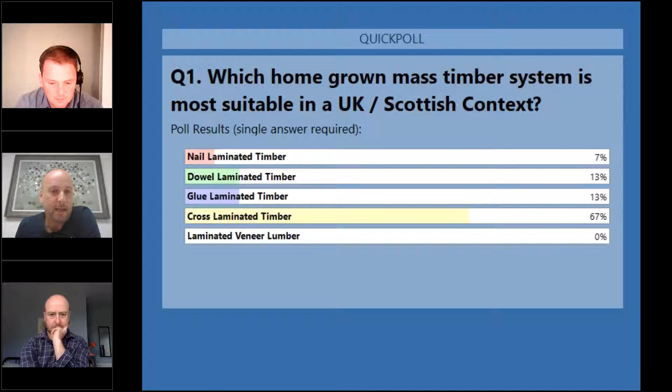So there's the results, and no huge surprises. Cross-laminated timber leading the way there, followed by glulam and dowlam jointly, and then finally nail lam, with no votes for laminated veneer lumber. Okay, thank you very much.

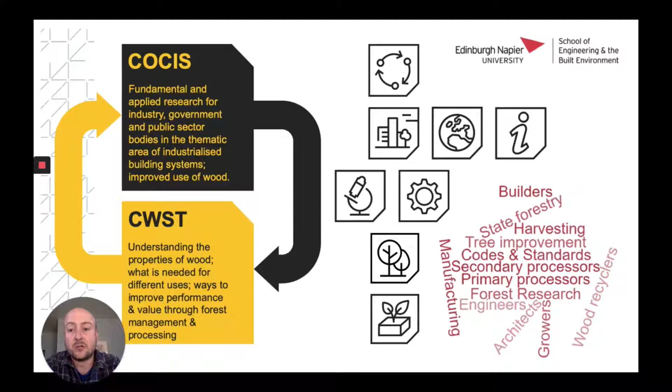We do this through undertaking core and basic research, applying that into the sector in order to create impact, and we engage externally with both industry and stakeholders in that regard. Importantly, we map student talent onto this through the Built Environment Exchange Programme to accelerate their careers, but fundamentally to accelerate cultural change within the sector. We don't do our work in isolation, indeed we do it in collaboration, both externally and internally. With respect to this project, the Mass Timber project, we work closely with the likes of the Centre for Wood Science and Technology, given that they undertake the research work to understand the properties of wood, the influence of silvicultural practices, and what this means in terms of grading rules, etc. By us interfacing with that work, we can look to add further value to the resource through such things as engineered timber products and indeed mass timber systems.

We have a back catalogue of work in this regard, and indeed we work across the varying systems in terms of panelised, volumetric, hybrid and sub-assemblies, and we've worked a great deal with mass timber systems, both in terms of

homegrown mass timber products, where we've even pilot manufactured and tested these products and indeed utilised them within showcase examples such as the Commonwealth Games Athletes Village.

We've worked also with imported resources such as tulip wood and the American Hardwood Export Council on the Multiply project, which was exhibited at the V&A in London, where we undertook the quality assurance test work.

And we've also worked with the likes of Carbon Dynamic on the Dyson Institute for Engineering and Technology, which used, of course, imported resource, but we provided a degree of engineering intervention with respect to the volumetric CLT units that were to be used for that project.

Importantly, we digitise a lot of this work. We harness our research in the digital environment, and indeed we have a strategic agreement with Trimble, and we have established a Trimble Technology Lab at Edinburgh Napier.

And of course we exhibit this work publicly as well, working with the likes of Architecture and Design Scotland, and of course we also publish this work through such publications as Mass Timber, an Introduction to Solid Laminate Timber Systems, and most recently Off-Site Industrialised Timber Construction, published by TRADA.

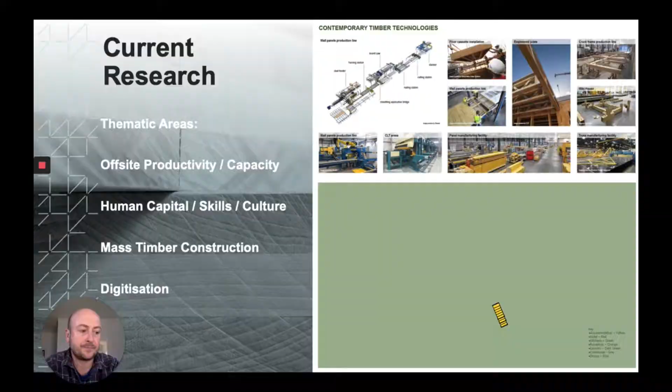So we work across a range of thematic areas: off-site productivity and capacity, human capital, skills and culture, mass timber construction, and indeed digitisation. And we do all this work with a large influence and to create impact into the

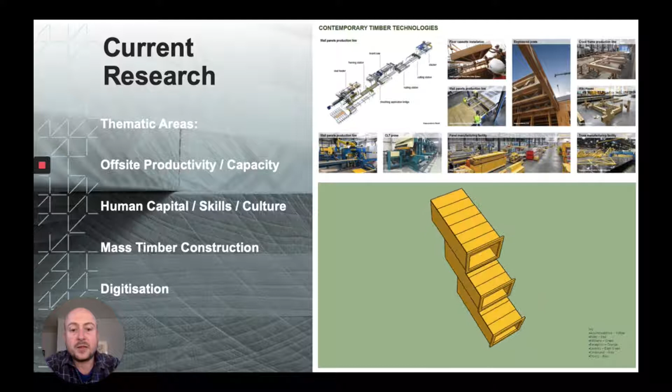sector with respect to the specification of contemporary timber technologies. Importantly, these thematic areas, of course, cross over each other, and if we take productivity and construction productivity and why

it's stagnated, and of course we want to improve upon that through off-site and manufacturing approaches, but equally taking cognizance of the necessity of delivering this new built environment for such things as the growing urban population without impinging upon

the environment itself through the utilisation of non-renewable resources. So of course using timber in this respect is beneficial as a result of it sequestrating carbon, whereby if we

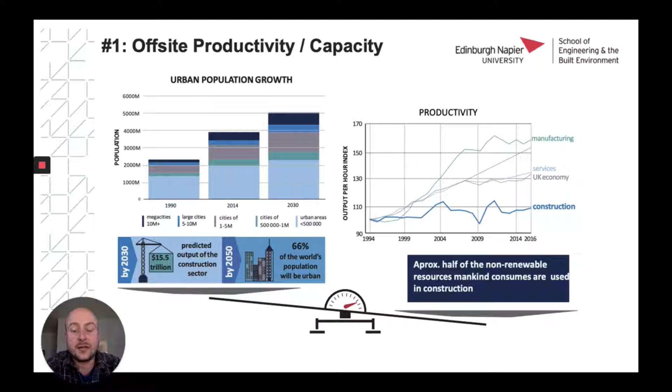utilise mass timber products and systems, then we can lock more carbon into the environment and actually start to reverse the climate crisis. So we've worked across the varying mass timber systems in terms of both the glued and non-glued

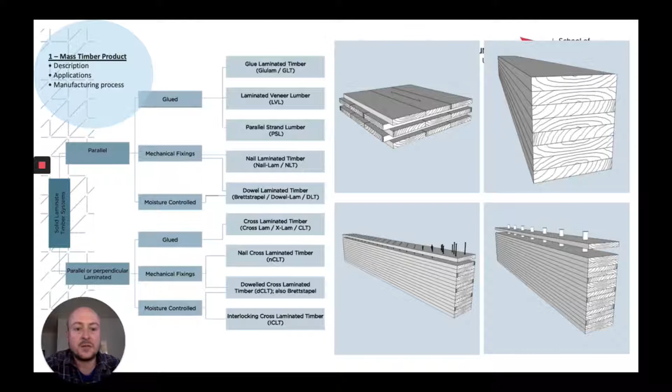products, in terms of CLT, glulam, nail-lam and dowlam. And we have an awareness of this wider global market and the upward trajectory which has taken place in terms

of European production output, and indeed the boundary conditions which are being pushed through the delivery of such projects as Mjøstårnet, which is an 18-storey building in Norway which uses engineered and mass timber products for its delivery.

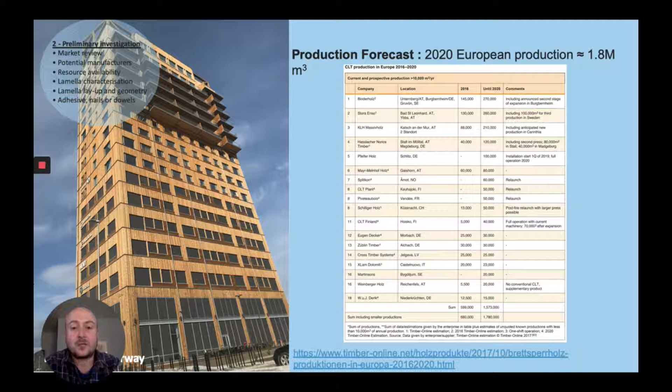So there's a huge opportunity which resides globally, and we'd like to see that take place in UK and ideally in Scotland. And of course, to mobilise this, we have to understand the investment model.

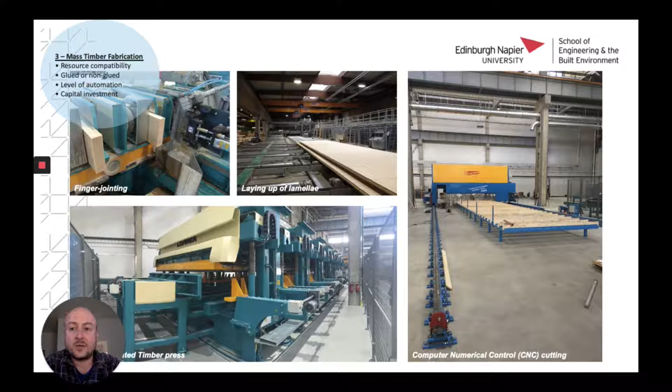We have to understand what's necessary to unlock that capital investment for manufacturing to take place, and of course integrate that with our available resource and select the right mass timber product to be utilised.

course ourselves as the academic delivery partner, and assembled a cross-section of stakeholders from the supply chain with respect to tap into their knowledge base as well.

So in this regard, we have a series of work packages which we're working through, and today we will showcase those to you, and Wojciech will provide a wider explanation of the work that's been undertaken today. So with that, I'll hand over.

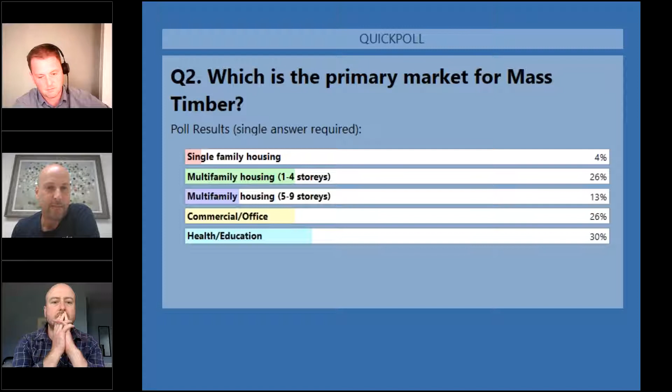And there we have some fairly close run results. Health and education coming out on top, just in front of commercial and office and multi-family, low level or low rise housing. There's some higher rise stuff there, and single family housing coming up at the end. So thanks very much for that.

Okay, our second presentation today is from Wojciech. Wojciech's been the lead academic for the commercialization of mass timber project we highlighted earlier, and I'm delighted to welcome him to give us an update on the work that's been undertaken to date. So Wojciech, over to you.

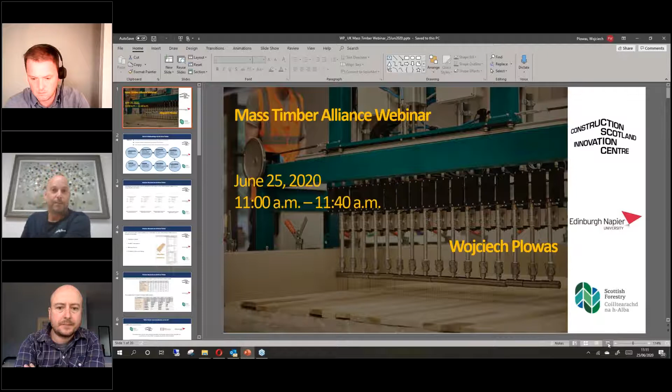My name is Wojciech Płowaś. I'm a research consultant at the Center for Offsite Construction and Innovative Structures. My background is in structural engineering. I specialize in timber engineering. And for the past few years, my research focus was on mass timber systems such as CLT, dowel laminated timber, nail, and glue laminated timber.

Well, today I will talk to you about the recent advances we've made in the last few months in the research of mass timber systems. However, before I continue with my presentation, I would like to briefly introduce the research methodology that we adopted during the research of mass timber.

So the research methodology first came into play when we were thinking about best ways of utilizing all the research information we have on file. So in a sense, it formed a platform to ensure the consistent reporting of all the available information. What it also allows us to do is to identify any gaps in the research. So just to quickly go through the steps adopted during the research.

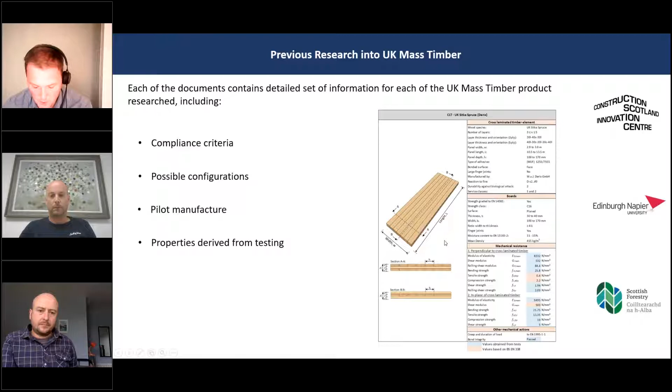Finally, you will also see mechanical properties derived from testing. So this is only one table. There's way more tables like that available within those documents.

And this is one of the reasons why, together with Construction Scotland Innovation Centre, Scottish Forestry, started this project, mass timber commercialization. So one of the reasons is also to close the gaps, but also to get full understanding of the feasibility, potential cost, benefits, constraints of mass timber manufactured in Scotland using a homegrown resource. So as Robert has mentioned, the project is split between 4 distinct work packages.

So work package 1 is to do the parametric analysis of mass timber design and analysis exercises using the research data, so applying the results, updating what we know already, and extending the information we have. And this is also to do with the development of technical details. Work package 2 is the market assessment. So this is where we look at the potential costs of different mass timber products and how do they compare with the materials and products available on the market.

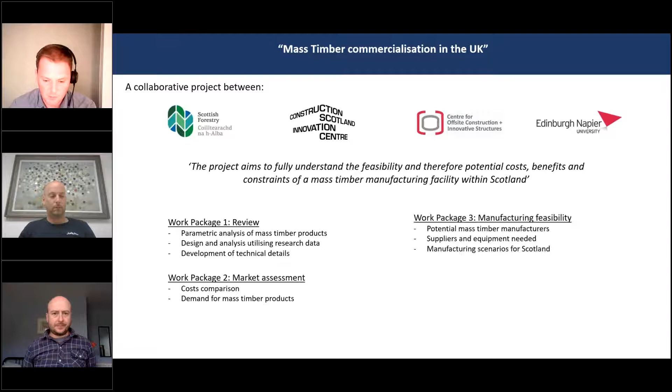What we also try to do via this project is to get an understanding of the current demand for mass timber products. Work package 3 is the manufacturing feasibility. So this is where we're going to create the case studies for manufacturing scenarios, so setting up the manufacturing facility in Scotland. We're going to review the potential suppliers of the equipment, what equipment is necessary, and so on. And finally, is the work package 4, fabrication and pilot project.

So what I'm going to talk today is the first two work packages. So we've carried out some parametric analysis, carried out some design exercises utilizing UK homegrown mass timber. I'll focus mostly on the CLT. Also, I'm going to close off my presentation with some information on market assessment.

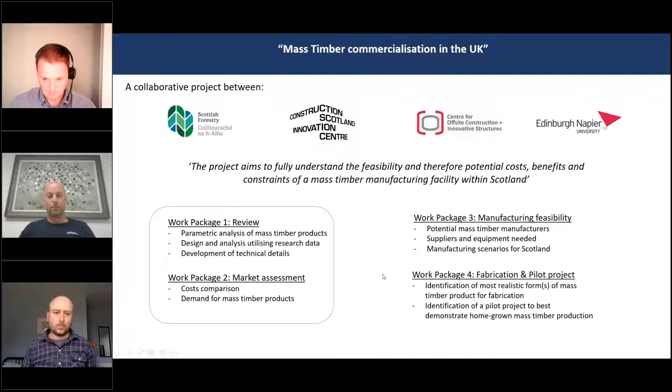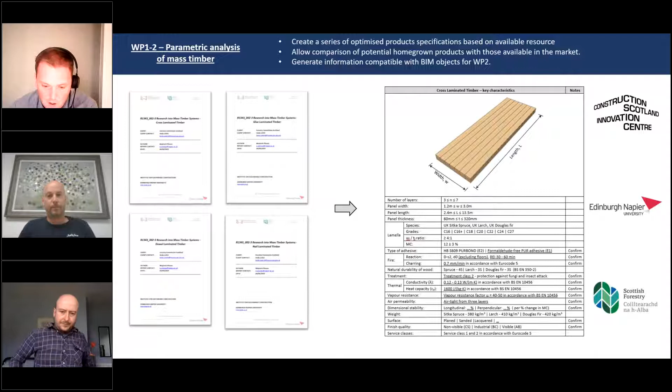Another part of the work package 1 and parametric analysis was to compare a potential CLT made out of UK homegrown resource and what's currently available on the market. So we've reviewed the literature. As a result of the research carried out by the center within our institute, we know that the UK Sitka spruce, which is the species most likely to become a commercial species, can grade 25% to C24 and the remaining 75% to C16. So this can be achieved with a minimal amount of reject.

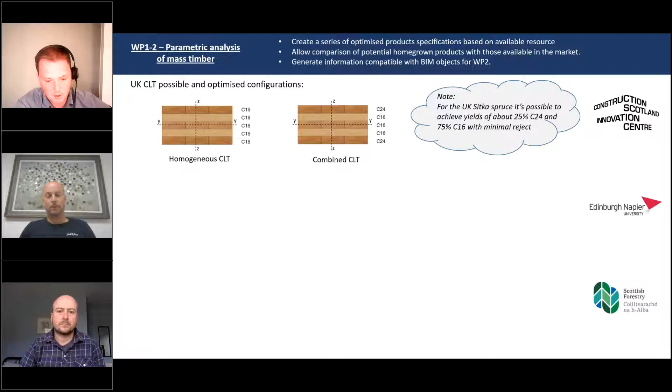So now the idea is how to best utilize this resource. So for that, we've created a series of hypothetical panels, let's say, made out of UK homegrown, that one day might become a homegrown CLT. And in order to best utilize the material, we've introduced 2 types of the material. One being the homogeneous, denoted by the letter H, which contains only one grade, which is in this case C16, and what we call combined, which is consisting of C24 and C16.

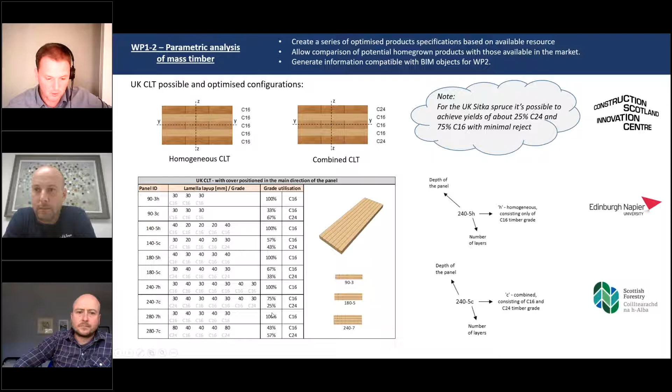If you notice in this table, you can see that the C24, the higher grade timber, which is stronger and stiffer, is located at the top and the bottom of the panel, and there is a reason for that. It's to do with the stress distribution when the beam is subjected to loading. So the highest stress concentration is always at the top and the bottom of the beam or panel. Okay. Also included here is the percentage of how much grade is being utilized. I'm gonna carry on. I'll tell a little more about this in a few more slides.

Okay. So after creating a list of hypothetical UK CLT panels for comparison purposes, we had to develop a design spreadsheet to allow us to create almost indefinite types of panels with as many possible layups as possible. So we've done that. We are now in position of changing the layout the way we want, the way the market needs, and check in this case just structural performance.

So in first instance, just to check what we're dealing with, we've compared those three panels. First panel being a standard CLT, which usually consists of C24 high-grade material. We then compared it to C16 homogeneous CLT and a combined version of it.

Throughout the research, it might not come as a surprise to anyone here that the most critical factors determining the design with the CLT, design of the floors, is either deflection or vibration of the panels. So these are the 2 properties I focused on because those 2 are the most often critical.

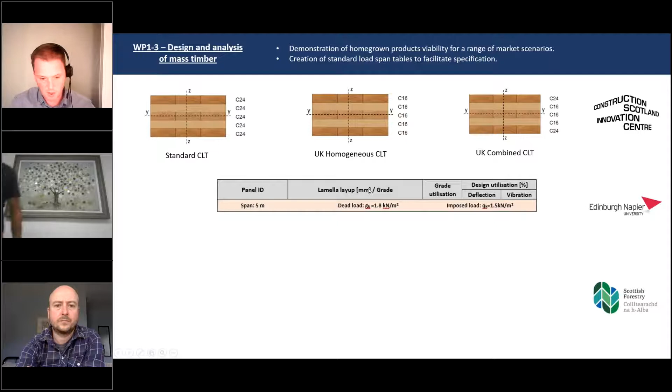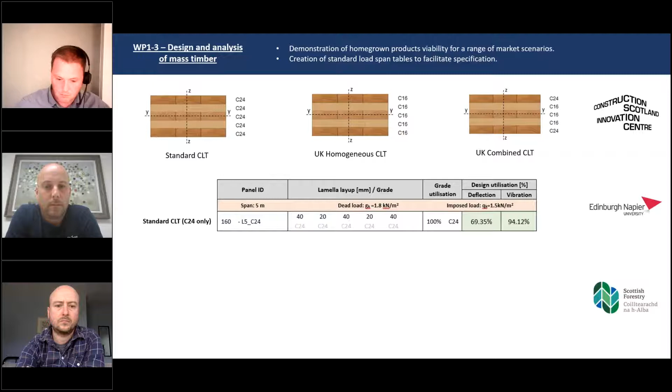So just to carry out the simple comparison, I created this span. So all those 3 panels were subjected to the same span and loading conditions, designed in the same manner. So if you look at the design output for CLT made of C24 only, it passes the design, it's good to go. Using the same method for design of the CLT panel of the same depth and the same lamellas and the same configurations, we see that this panel would fail in vibration.

However, if we change the top and bottom lamellas to the stronger material C24, which will result in a 50-50 split between two timber strength grades, we will almost pass the design. And the percentage you see here, maybe I should have told that earlier, is the utilization. So in this case, 94% of the strength is used to resist the vibration. It's almost as good as the C24 only panel.

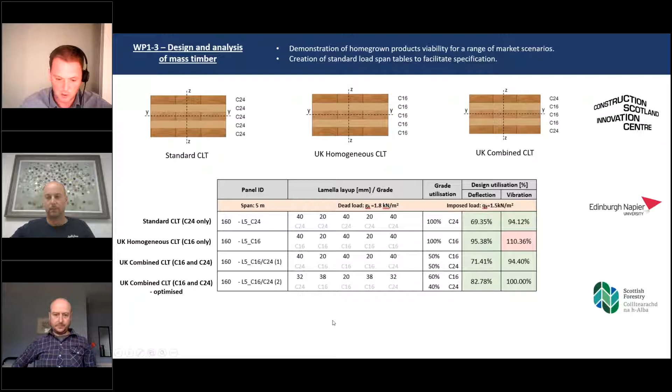Just for fun, or just to prove the point and check how spreadsheets can be used, we created an optimized version. So the panel depth is still the same, but what we've done here, we optimized the ratio of the different strength grades, and the result came up positive. Although, yeah, 100%, we passed the design, but this is just really for the demonstration. We probably wouldn't go with this panel. We would have to slightly increase the top and bottom. But this is just to prove that we can modify the layup the way we want.

Okay. So another way of using the design spreadsheets we've developed is to create span tables for those 5 different types of panels, which represent the UK span tables for the UK CLT. So we used 5 different loading conditions for development of the span tables, and those reflect the designation of the building: single-family dwellings, hotels, offices, classrooms, and museums. The list is longer, but this seems to be most appropriate for the context. So you will see in a few slides that we use those variable loads as case studies.

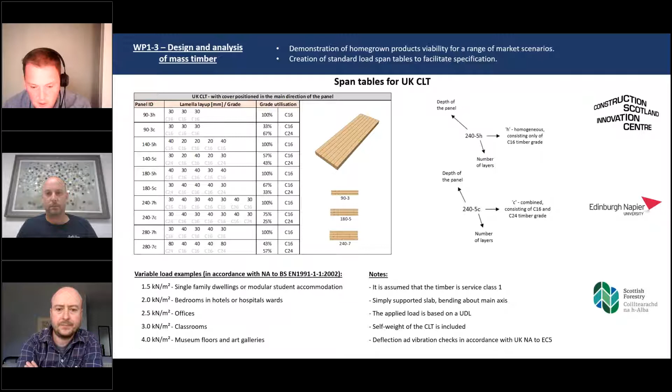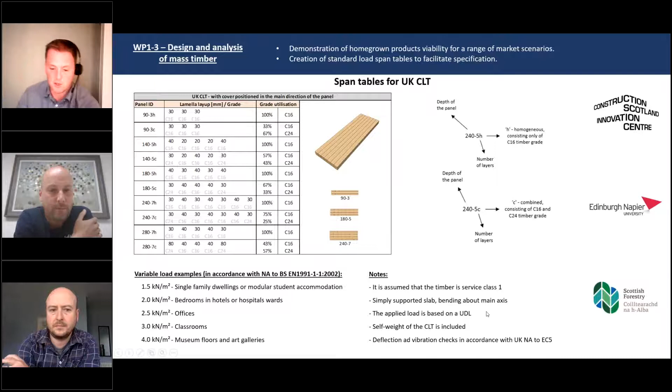A few notes regarding the design for those of you who are interested. I'm happy to answer more detailed questions after the presentation, but for the purpose of this presentation, I added those notes. So in the design, we assumed that the timber is service class 1. The slab is simply supported and bent about the main axis, and only UDL is applied. Self-weight of the CLT is included. Deflection and vibration checks are carried out to the UK National Annex to Eurocode 5.

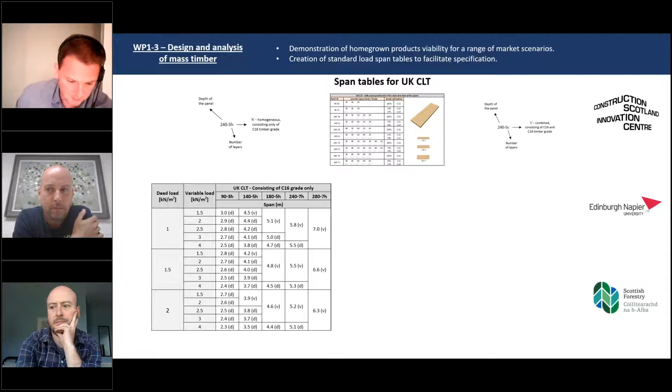Okay, so using all this information, the list of hypothetical panels, we've created a span table. So what we have here is loading. We've got the dead loads, 3 different cases for the dead loads, and 5 different variable loads. At the top of the table, there is the type of UK CLT that we're looking at. Here is the ID of the panel. The first number stands for the depth of the panel. The second number stands for the number of lamellas used, and H or C stands for either homogeneous or not homogeneous, as shown in this table.

Finally, we have a maximum span in meters. What I've also added is the letter V or D, which stands for vibration or deflection. So this is the design output, and what's the most critical for this particular panel, whether it's vibration or deflection. Okay, so we talked about UK homogeneous CLT only. Now we have a combined CLT. Again, the panels here are consistent with the list of the panels in the table. So we can see here that the span increased significantly.

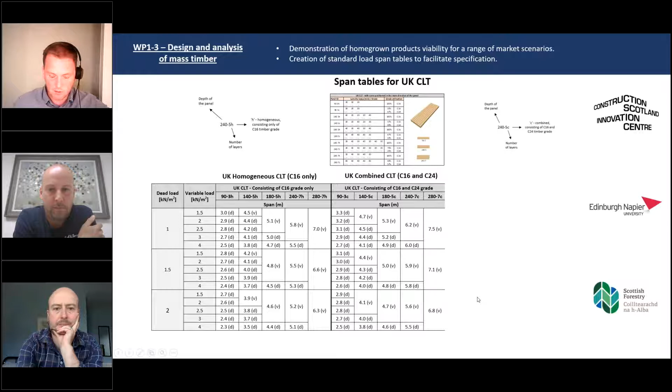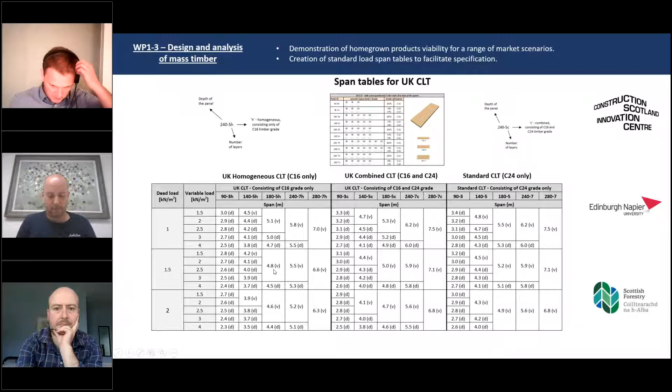Just for full context, using the same methodology, we also carried out design exercises and created the span tables for C24 CLT only. At this point, you're probably looking and trying to compare the span tables. I would go through that as well, but I would try to make it easier for everyone, because I crunched the data. So how exactly does standard CLT made entirely from C24 compare to UK homogeneous and UK combined CLT? After looking at the data, we've noticed a 9% reduction in span on average.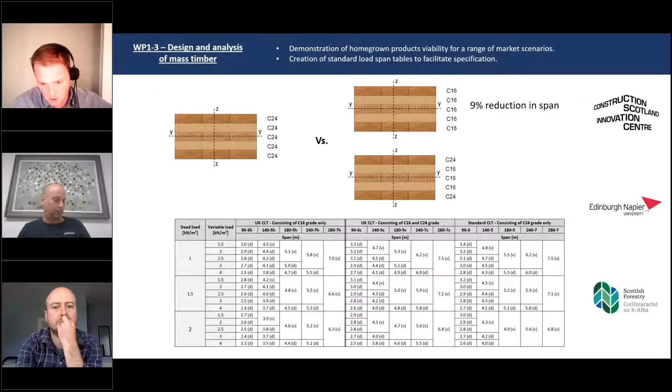The difference is 9% between C16 and C24 CLT only. In another case, the combined CLT, there's only 2% reduction.

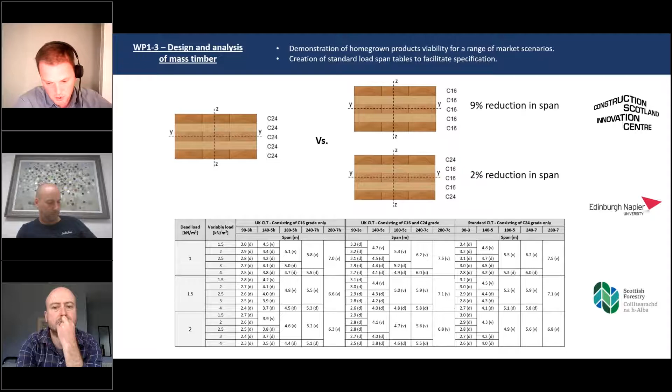Okay, so there's a few more slides left. The second part of the project, mass timber commercialization, is to do with the market analysis. Most of you should be aware by now that we are doing this UK mass timber questionnaire. This is to help us get input from the industry on what is the current demand, what are the barriers, what is the best product for the market, and to help us analyze it and develop the product which is the most suitable.

For those of you who still haven't carried out the survey, I would like to ask you to do it, because the kind of information we get from you is essential. The survey has been on for a while. I think we started it in February this year, and I want to show you some output we have so far using the responses we got so far.

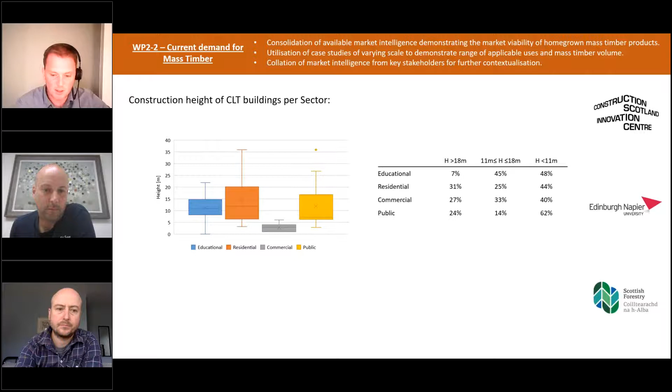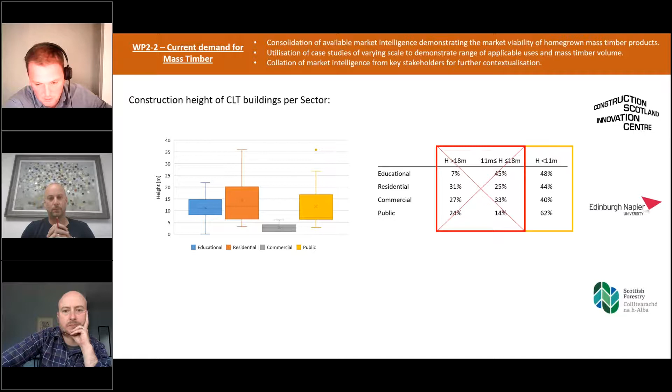I know this is a hot topic these days because of the ongoing discussion about whether the government is trying to suggest limiting the height of buildings made out of combustible material such as CLT. So that's why we've created this table. According to our sample range selected for the analysis, about 50% of the buildings were constructed at 11 meters or less, which means that if the legislation passed and buildings over 11 meters made out of combustible material are banned, we could potentially lose 50% of the market.

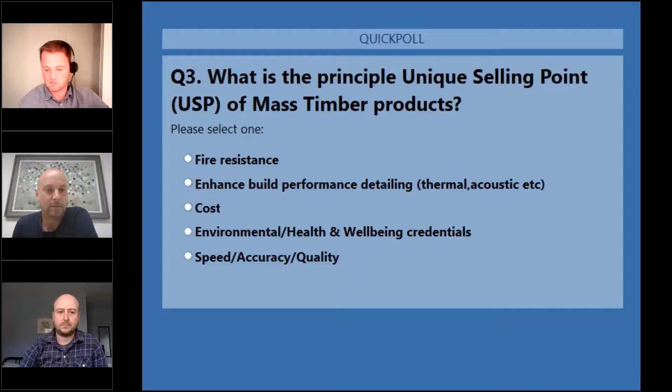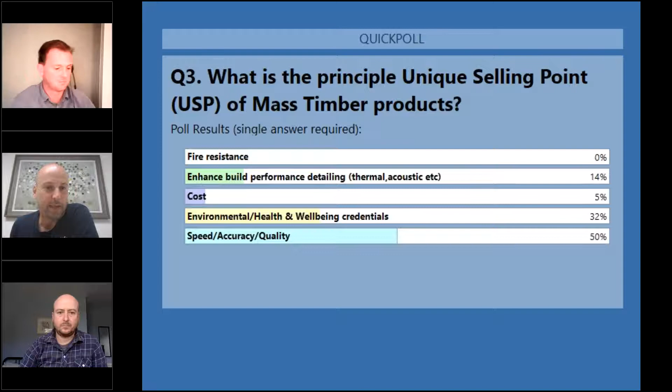And again, no big surprises. 50%, so half of the audience think speed, accuracy, and quality is the key unique selling point, followed by the health and well-being benefits, followed by enhanced building performance detailing.

Okay, today's final session is an opportunity to run through some of the questions posed by you, the audience, to the expert panel. First question I have, perhaps for Robert. How simple is the automation process if we're looking at combining C16 and C24 grade timbers in a manufacturing facility?

I think you're on mute, Robert. Sorry. Sorry about that. Made that mistake at least once a day, right?

So, as you know, it's not currently common practice to have these types of layouts, but that's not to say that it wouldn't be possible, and certainly something that we want to do with respect to this project is indeed engage with some of the manufacturers to see what could be done with respect to that type of capability. And of course, there's things that we can do, as you know, at the Innovation Centre and via the Innovation Factory to perhaps trial some of this.